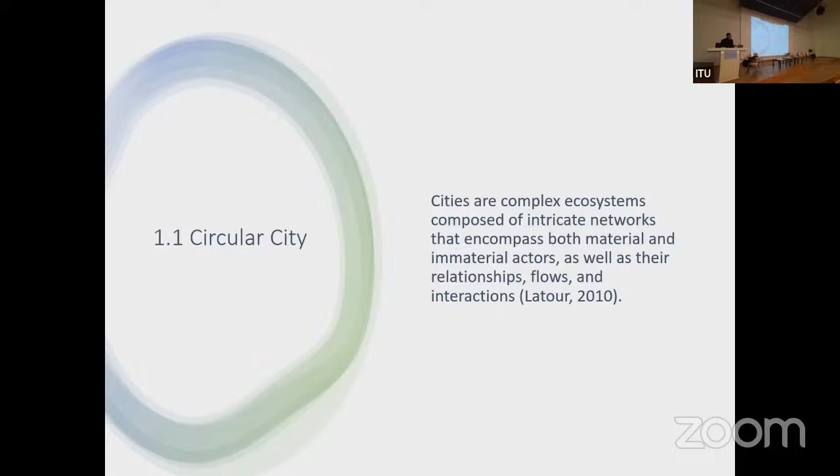But enabling circular cities requires profound cultural mindset shifts on our part. So here you see a diagram from 1977. This ecological perspective provides a rich frame that we need to revisit.

Systems thinking has always been present in our thinking, but now if we frame cities, we understand them as complex living ecosystems with intricate flows of materials, energy, people, and information. If you think of cities as having a metabolism, taking resources, transforming them, into waste, this is completely transformed by understanding how cities are and how we can co-create them.

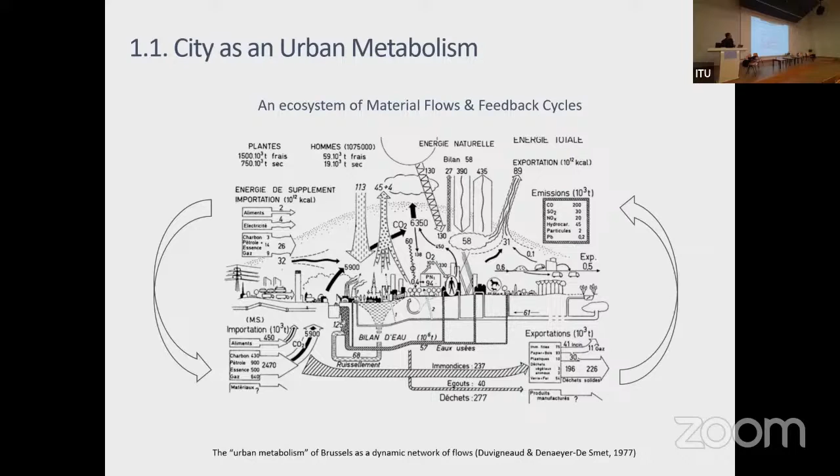So how do we create sustainable circular cities? The circular economy gives us valuable feedback on three key strategies. First, optimizing our use of resources, doing more with less. Second, extending the lifespan of products through repair, remanufacturing, repurposing. And third, adopting regenerative practices that restore resources.

What shifts in policy, business, and culture are needed, and could digital innovation be a catalyst? Transitioning to circular cities necessitates changes at multiple levels: top-down initiatives led by governments and policymakers, and equally bottom-up grassroots efforts by communities on the ground. We need to transform systems of optimization, sharing, looping resources, and exchanging goods and services. And critically, we need to harness the power of digital technology.

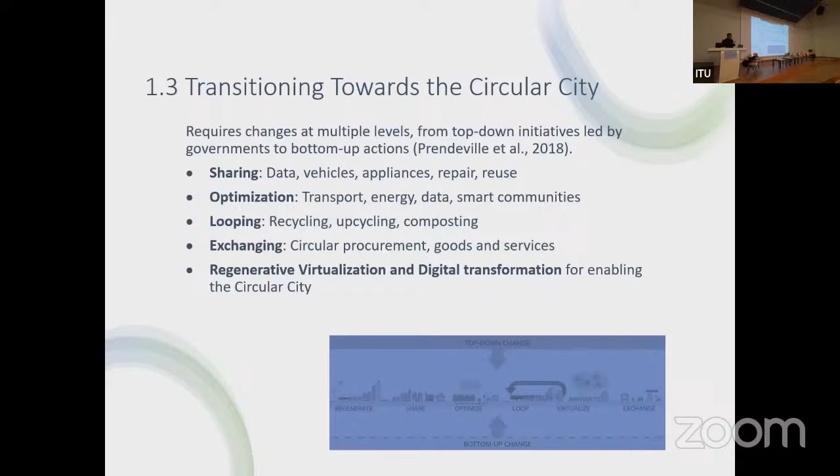So here are the two main questions I would like to address in this part. Based on the premise that digital transformation requires cultural mindset shifts beyond adopting technologies, to enable digital transformation for circular cities, what types of shifts in our understanding are needed? And question two, from an eco-inclusive design perspective, what are the agencies of digital technologies and objects in relation to the circular?

So here's a proposal with mindset shifts required to enable the transition to circular cities: ontological, cognitive, epistemological, axiological, and methodological transformations in our underlying mental models about cities, resources, and our philosophical stance.

So we understand spatial practice with a human-centered worldview. However, rethinking cities as circular, regenerative entities creates a paradigmatic opening, a creative rupture which we can reach with the help of digitalization strategies.

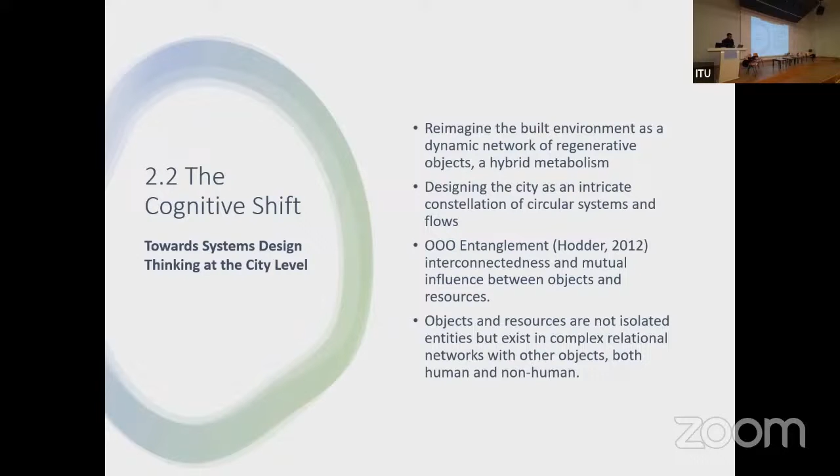And how can cross-sector knowledge co-creation cultivate innovation for digital transformation enabling circular systems? Epistemologically, we must transition from knowledge produced by isolated experts to cross-disciplinary, socially constructed knowledge. Learning together in context, we can gain wisdom about real-world challenges. This is the epistemological shift from mode 1 to mode 2 to mode 3.

Circular cities we design just for efficiency. Axiologically, this means transforming values away from efficiency and profit towards care, social justice, and environmental responsibility. Cities have physical, mental, and social dimensions, and how can we integrate ecological dimensions ethically?

Building on Lefebvre's spatial model, here I propose an ethical opening. I suggest adding an ecological dimension, generated with a protocol schema that interrelates the physical, mental, social, and ecological spaces of the city.

So the last mindset is the methodological mindset. Digital technologies proliferate during this era, so how can these technologies catalyze circular cities?

Methodologically, we must embrace digital transformation and participatory cooperation as key processes for cultivating circular cities.

Integrating key concepts from object-oriented ontology, we need to recognize and make use of the circular agency of algorithms, the agency of data, the agency of objects, sensory objects, hyper-objects, hybrid ecologies, and digital materialities.

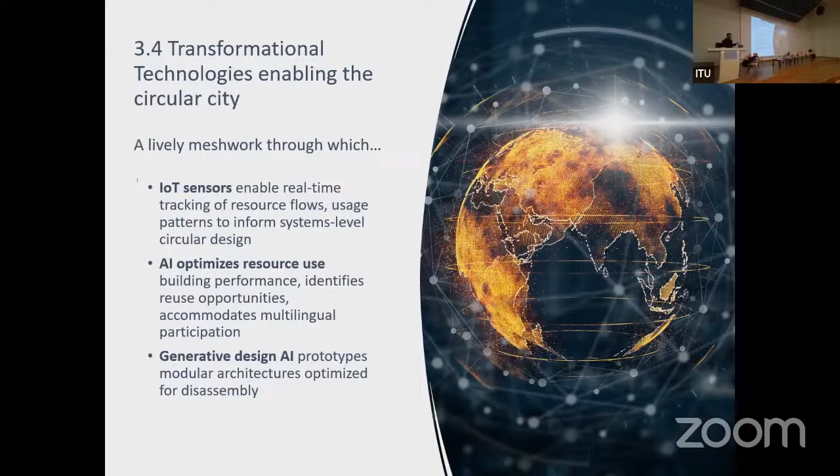Artificial intelligence enables adaptive management of complex urban ecosystems, and generative design facilitates modular architectures for disassembly and reuse.

Imagine a circular city where we use computer vision to automate life cycle assessment to reduce carbon waste. By reinforcement learning AI techniques, we model ecosystem dynamics, enabling coordination of interconnected urban systems.

Blockchain can provide secure tracking of materials and assets across entire life cycles, and smart contracts can automate circular transactions between diverse stakeholders.

How do these technologies integrate and accelerate the making of circular cities? Industry 5.0 couples digital fabrication tools like 3D printing with community creativity, and digital twins can allow virtual modeling of virtual resource mechanisms.

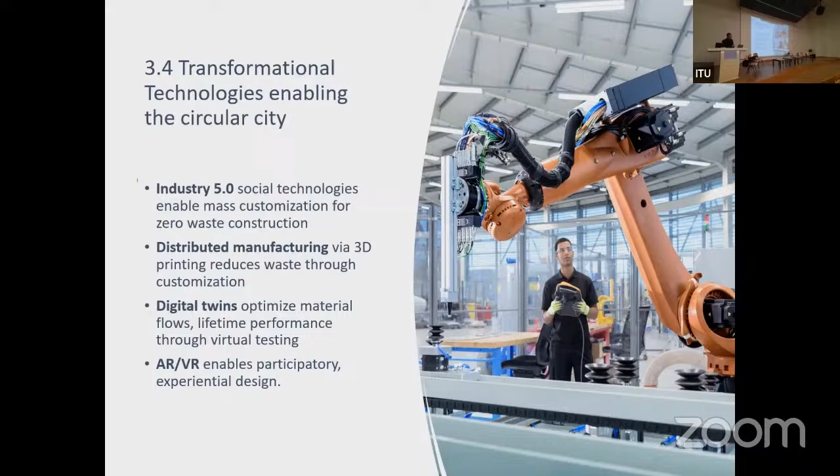And extended reality platforms can cultivate embodied experiences of future circular cities.

And last but not least, mixed reality, building information modeling, sustainable material libraries, and open urban data standards, like the valuable projects introduced in the first session, complete our technology toolkit for cultivating flourishing circular cities.

In closing, I would like to mention that enabling circular cities to regenerate resources requires both cultural mindset shifts and eco-inclusive digital transformation. So I would like to leave you with this question: what kind of digital transformations, tools, and software do we need...

...to enable the co-creation of circular cities?

I wanted to talk to you about timber construction within this context of the circular economy in the built environment. But just a few words on where I'm coming from.

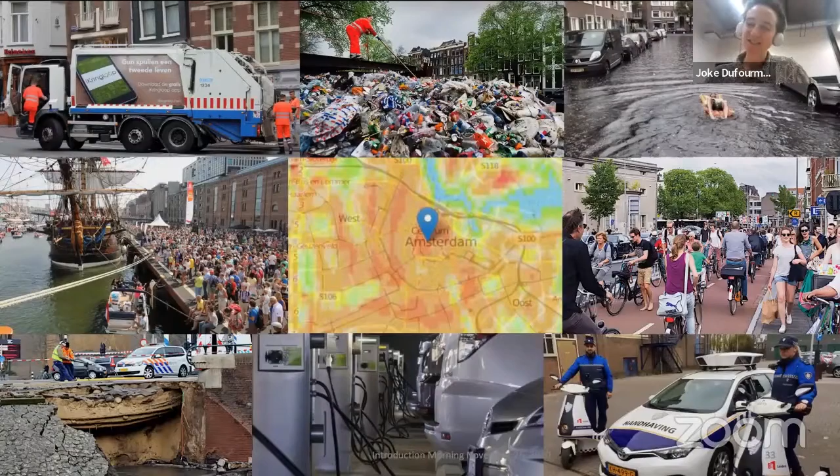AMS Institute is the Amsterdam Institute for Advanced Metropolitan Solutions, and rather than that name, what you're seeing here on the screen is probably a collection of problems that could be qualified as advanced problems in an urban context.

That can bring them together, and that's something that we're looking to tackle at AMS Institute.

We're looking to build a more prosperous city, specifically Amsterdam. For those of you who recognize the picture on the screen now, this is aerial footage of Amsterdam.

And we want to make that city more smart, sustainable, and resilient in the future.

The way we're doing that is through collaboration. We are a network organization, or a networked research institute, where on the one hand, and I like to compare this with Lego blocks, we have our academic partners.

Our academic partners are the Technical University of Delft, the University and Research Center of Wageningen, and MIT. On the other hand, which is the other side of the blocks, is the city of Amsterdam. So the municipality of Amsterdam is the fourth partner in this network.

And what we're looking at with our partner universities is developing solutions for this city, for the city of Amsterdam.

But then when you bring these two blocks together, what you notice is that actually they don't quite fit together well.

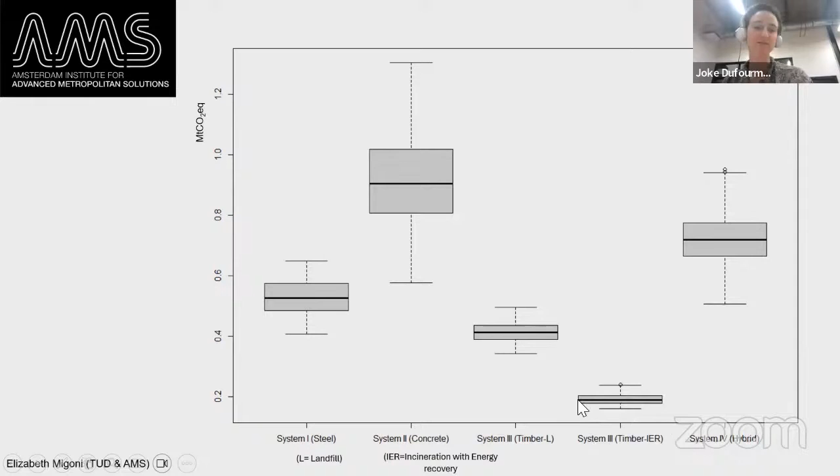And what we want is of course the lowest possible whole life carbon. So the system, a timber system that would often be applied here, is this one - system 3, where we use timber with energy recovery at the end of life. That is by far the system that is most advantageous when it comes to climate impacts.

So we're avoiding that. On the other hand, we're also storing carbon in those timber buildings that we build. Through the process of photosynthesis, trees take carbon out of the atmosphere and solidify it within their material. So as long as we use timber the way it is, as solid timber, that carbon remains in its solid form and doesn't contribute to climate change anymore. So we're also storing carbon in timber.

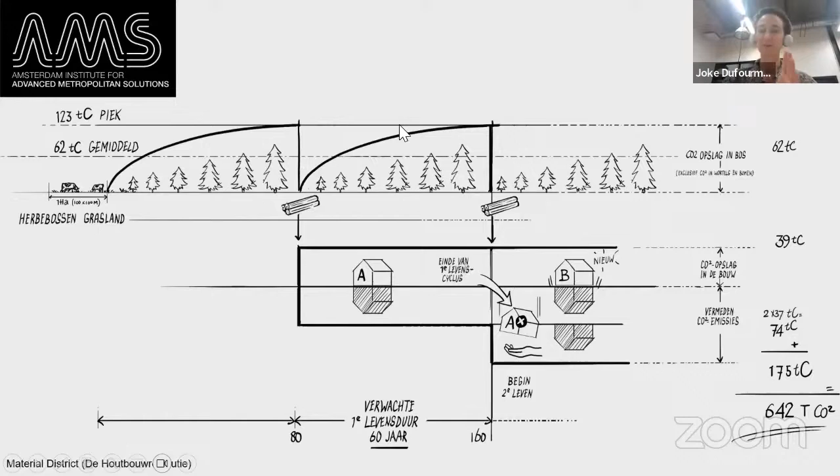And then thirdly - this lever, by the way, is not something that was integrated in these calculations - a third climate lever of timber is that we're storing carbon in the forests that we grow. So there's really 3 reasons why building with timber is good for the climate: we're avoiding emissions of conventional construction, we're storing carbon in our built environment, and we're also increasingly storing carbon in our forests, on the condition that they are sustainably managed, of course.

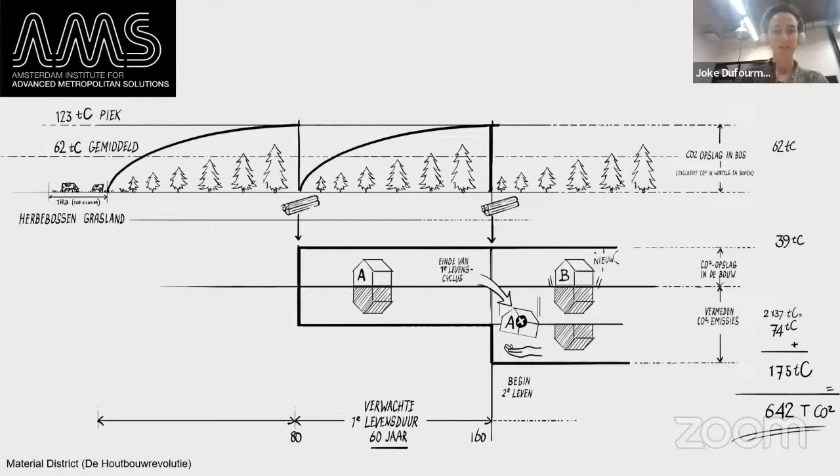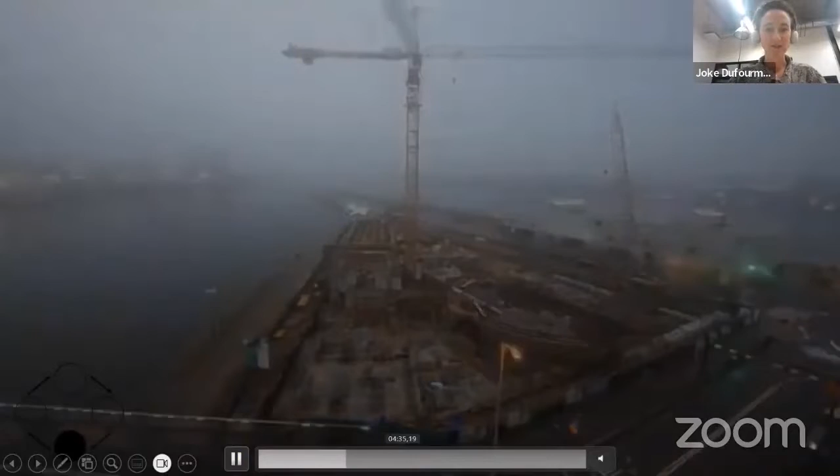Next to that, so not just for the climate, timber is also a really interesting material for the construction industry, in the sense that it lends itself very well for industrialization. So this is a video that I want to show you - a time-lapse video of Hotel Jakarta, a building that was built a couple of years ago here in Amsterdam. In the background you can see Central Station, so we're very much in the center of the city. And this hotel uses a kind of conventional base for the building.

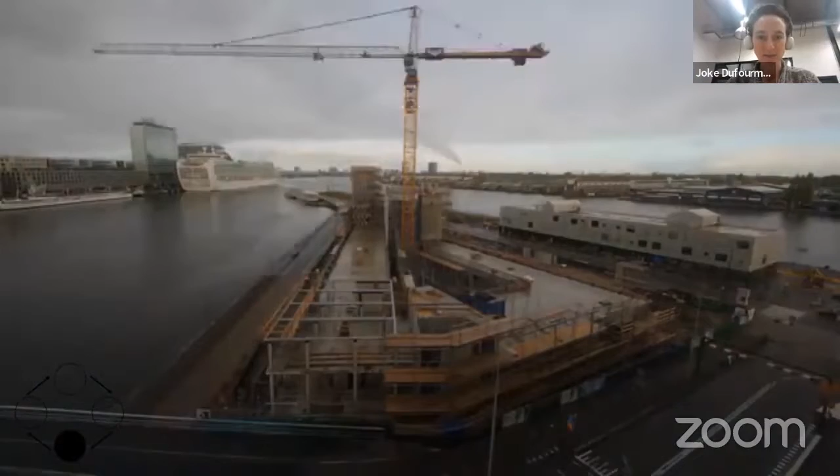But then the entire upper layers are made from prefab timber modules. This is about the moment in the video when we can start to see the modules arriving. And so now if you look at the back of the construction, that's a construction site.

That also means that we're radically reducing the kind of annoyance that construction sites tend to give in the city. So this type of image, we would like to see much less, and timber is a way of getting there. Less annoyance, but also high potential in terms of fulfilling housing demand within existing cities.

Timber is a light material. That means it's actually very suitable for different archetypes of building. On the one hand, because it's so light, it's very suitable for floating solutions. Here you see a district in Amsterdam, a floating district called Schoonschip.

But because it's so light, it's also very applicable for using in topping up, where you want to be really conscious of the weight if you want to keep using existing foundations.

But thanks to current technology in terms of mass timber products, we can even start building 100% bio-based timber buildings, even in high rise. So even for really fulfilling different needs in the city, timber is a very applicable material.

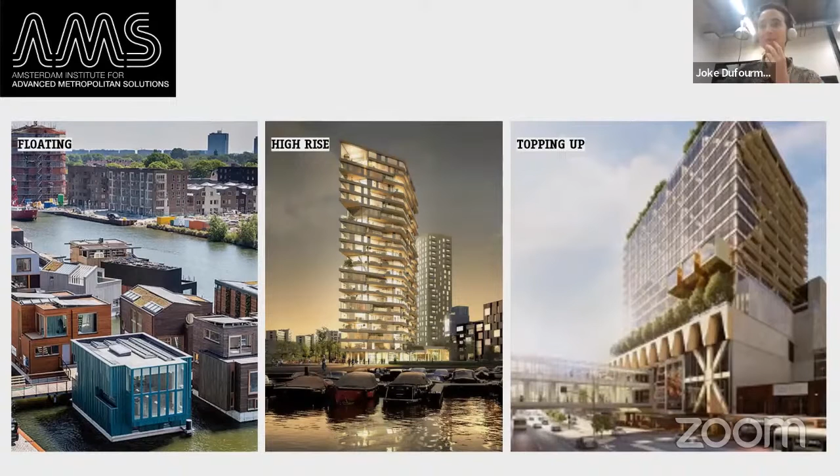Now, if we're seeing all this and hearing all this, one's immediate reaction can be, oh fantastic, what's not to like? Why are not all of us doing this? So this I want to point out a little bit more.

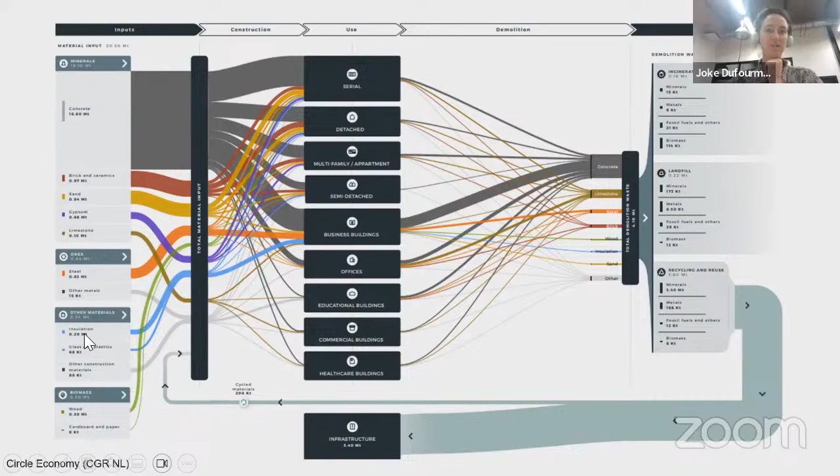This graph summarizes the materials that we use in construction in the Dutch construction industry. On the left-hand side you can see the different materials that go into the Dutch construction industry. If you zoom in there, right at the bottom left, that's how much wood and other bio-based materials we use. Right now we're at about 2.3% of building materials, based on volume, not weight.

2.3% of materials that go into the Dutch construction industry that are regenerative. Why so little? Just as a quick disclaimer, the Netherlands is different than other countries. There are countries like Sweden and Austria that have much more of a building culture where timber is ingrained. In the Netherlands, we have completely lost this.

One of the reasons for that is that there are quite a few misconceptions about timber when it comes to using it as a building material. There's quite a bit of preconceptions about it that aren't necessarily based on facts.

And that's why we said, if we want to achieve that 20% of regenerative materials in the Amsterdam metropolitan area, we're going to have to do something about that. That's why we embarked on the project of mapping out what the most common misconceptions were of the timber industry or timber construction, and then seeing what science says. We didn't necessarily produce new knowledge, but it was more of a compilation of existing knowledge, both from science and from case studies. This publication resulted from that.

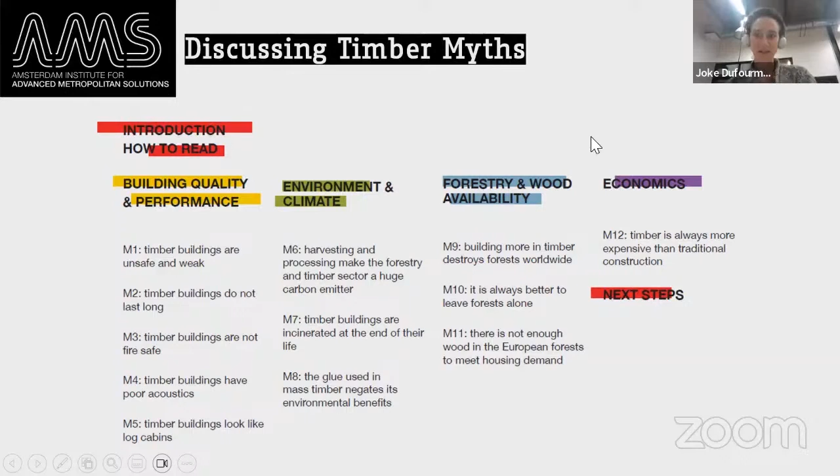What we noticed is that the most common misconceptions in the Netherlands really fall into four categories: some that relate more to building quality and performance, some that relate to environment and climate, some that relate to forestry, and some that relate to economics. So what I wanted to do for this presentation is really highlight a couple of these myths.

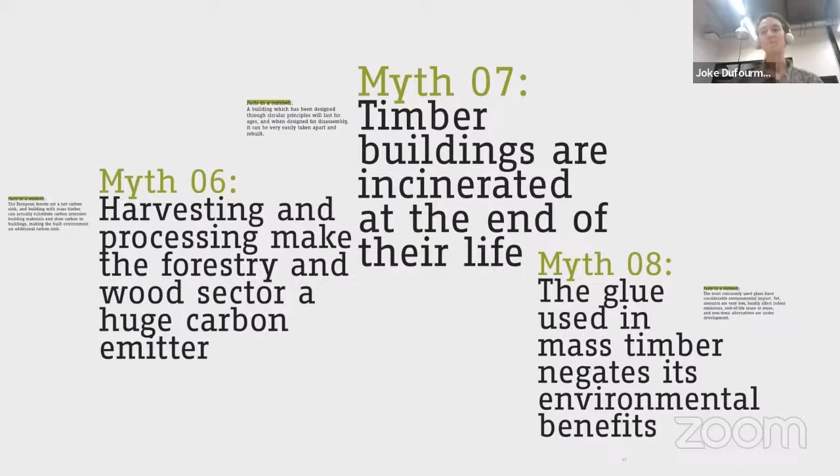First of all, there's the environmental impact of timber. Quite often I would receive a question where someone would say, hey, but actually all the harvesting and processing activities, don't they kind of nullify the carbon benefits of timber construction? And what about incineration of timber buildings at the end of their life? What about the glues and adhesives? Aren't they highly toxic materials that also nullify those environmental benefits?

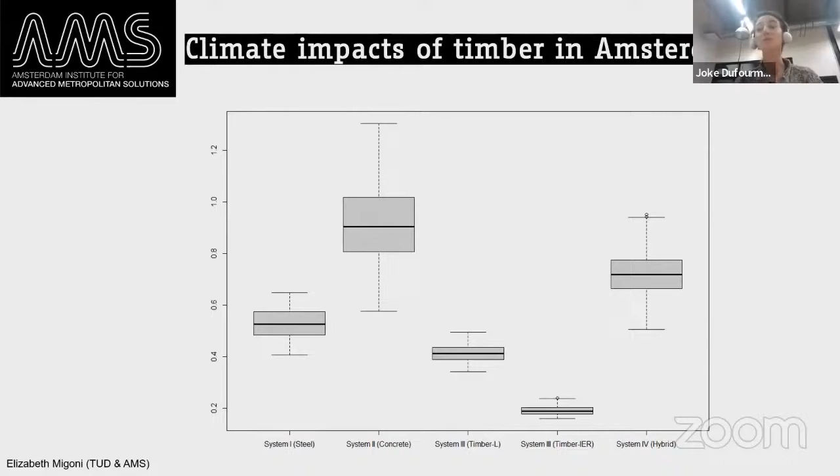Once again, going back to this graph, this is whole life carbon that we're including here. So all the materials and the steps in that supply chain, modules A to D, are included in these calculations. So the answer there is no, they don't nullify those benefits. Moreover, we did a brief calculation as to what the effects would be for the Dutch carbon budget of the construction industry if we realized our timber ambitions, or regenerative and bio-based ambitions, in the Amsterdam region.

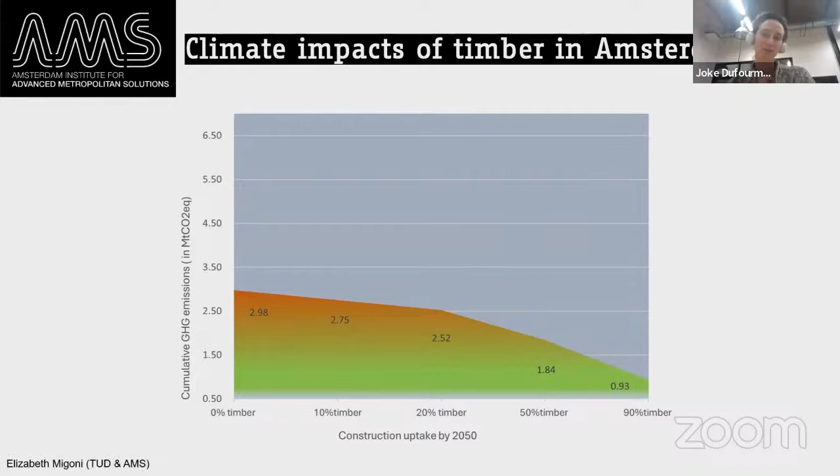And then we see that actually, going from taking much more than what would be rightfully our share—if you look at a balance of a per capita budget, for example—to going to practically zero, I can't say zero, but a very, very small share of the Dutch carbon budget of the construction industry. So that doesn't necessarily hold.

When it comes to incinerating timber at the end of its life, that also doesn't necessarily hold, because what we see is that timber, partly because of its industrialized applications, is a material that really lends itself very well for reusing and for circular principles.

I'm sure you've discussed cascading at the conference today already. Timber is an extraordinary material for the ability of cascading, where we can start with the use of mass timber products, and then ultimately reuse it in other buildings up until it's not possible anymore.

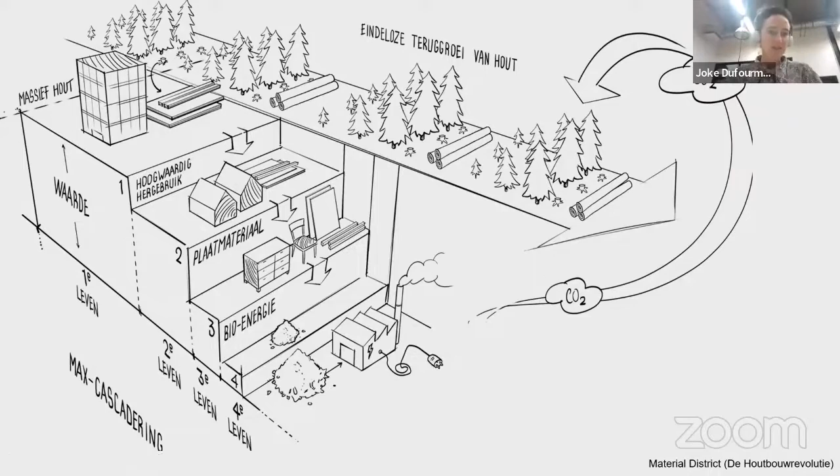In terms of structural integrity, for example, we start using it as a board material until it ultimately becomes bioenergy. But by the time we've run through this entire life cycle, we're about 150 years further. So if we're looking at that time span, that forest can actually regrow multiple times during that one lifespan of a timber component. So in that sense, also very high potential for those circular practices.

That doesn't mean there's no possibility for improving. There's still a certain climate impact of the timber construction industry, so here we analyzed all whole life carbon emissions for those different material archetypes of buildings, and then we noticed that from that timber system, what becomes most relevant—this is the right one to look at, by the way.

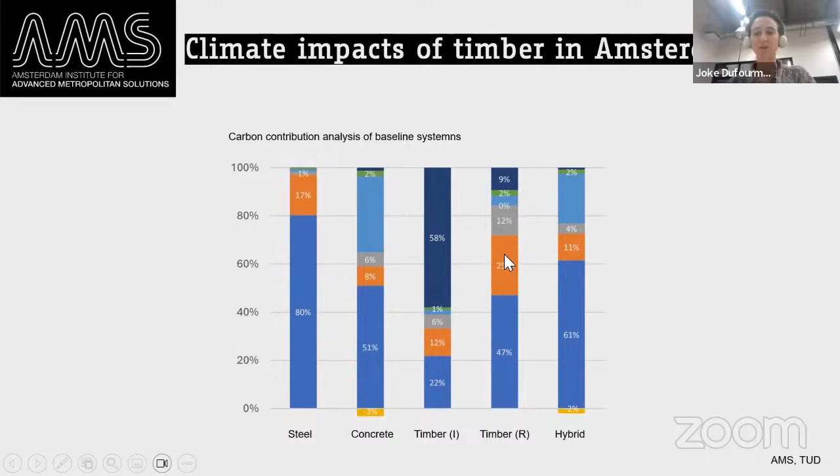What we're seeing here is the impact of the end of life of timber in case we incinerate it, or in case we cascade it—which is also, in practice, the case in the Netherlands. One of the more problematic factors becomes logistics. That's what the orange share is right here.

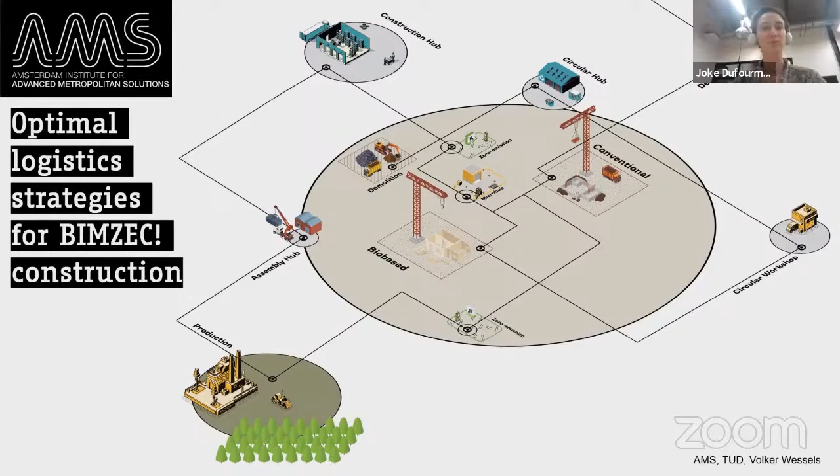There's all kinds of supporting activities that can take place there and reduce the logistics-related emissions by another 30%. Right now what we're doing is modeling the optimal locations and functional programming of these hubs in the city.

Another question we receive quite often relates to forestry: is it always better to leave forests alone? Our forests are so precious to ourselves, to global ecosystems, and to the climate, that we can't possibly be cutting down the trees there.

Well, the reality is a little more nuanced, in the sense that forests actually do benefit from sustainable forestry and sustainable forestry management. Here we see a baseline of what we're doing right now in terms of non-intensive forest management—what happens if we leave the forests alone, which isn't necessarily the best scenario, as you can see—and what happens to the climate impacts of forests that we use as production forests.

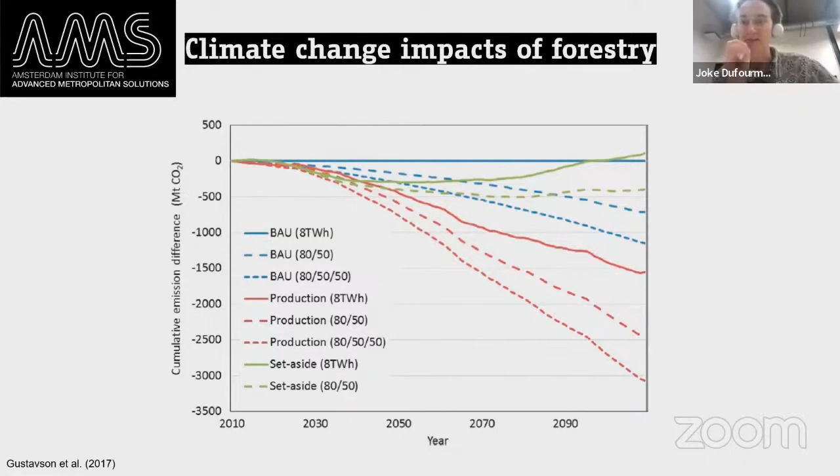And then one last one to end with, which could serve more as inspiration. From an architectural point of view, is timber really an interesting building material? Or are bio-based materials interesting building materials? I wanted to show two things—one relates to bio-based materials and what their potential is for architecture today and in the future.

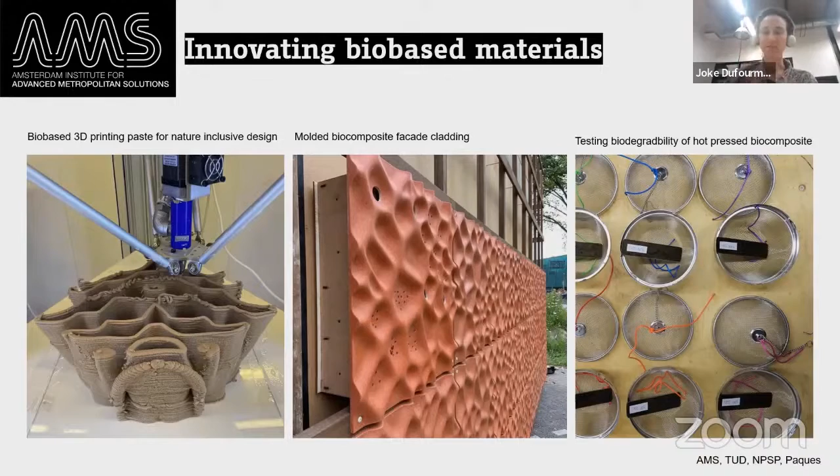These are some projects we're working on at AMS Institute in terms of developing biocomposites. They're often waste-based, but always bio-based, and to what extent you can make architecturally interesting shapes with them. But also just inspiration from other buildings in Amsterdam, in the Netherlands, and around the world, to show you that timber is a highly versatile and potentially really interesting architectural material to apply.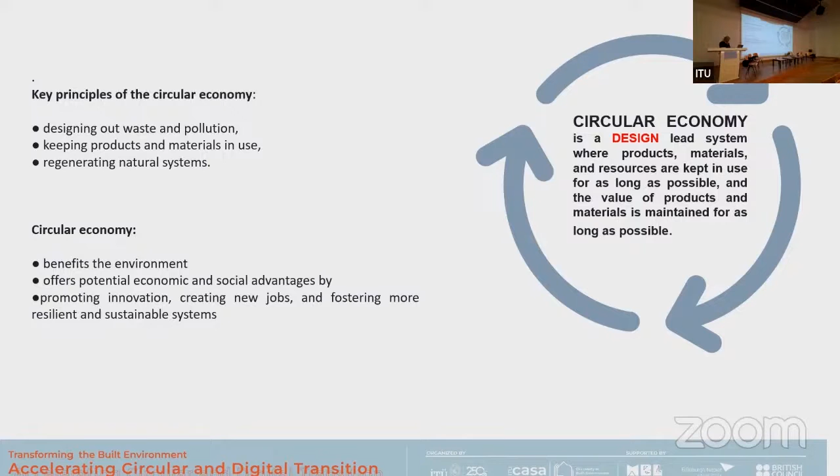When we look at the cities, they consume 75% of the natural resources and produce 50% of the global waste, 60 to 80% of the greenhouse gas emissions. So it is very important that we define how we are really going to integrate the circularity concept into the city scale.

Which is the system, the machine that is actually polluting our world. So for macro scale, Mustafa Şahin was telling in his discussion that there are 3 scales of applying circularity: meso, macro, and micro scales. This is a macro scale actually, where we have to really try to find the way how we are going to apply this concept.

What is circular economy between the cities - design out waste, and what if we design out waste and pollution from cities, or what if we keep products and material in use in cities and maintain their value, or regenerate the natural system in and around the city? These were the discussions and questions put on the table by Ellen MacArthur Foundation about circular applications at the city scale.

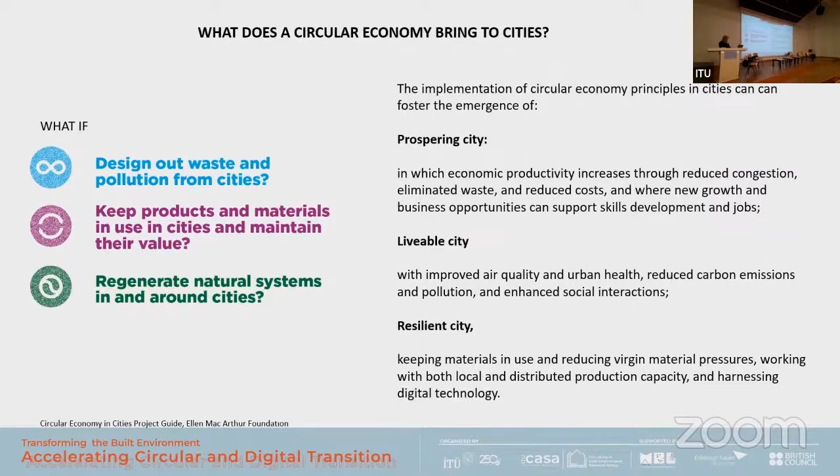So the cities that are applying the circularity concept have the promise of prosperity, a livable city, and a resilient city. They can achieve this type of city.

In cities that implement circular economy, there are a lot of benefits that we can find, really, but there is no possibility that we can apply all these concepts 100% in cities. So the best way is to start with simple scales, small scales, then develop the best cases, so that society can accept these new changes.

I think that's the last one. I'm going to take a bit long.

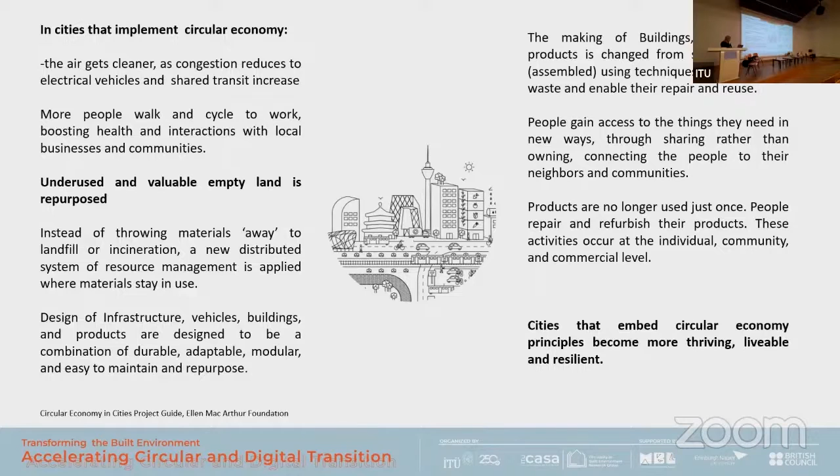So, utilizing the circular economy concept in cities has a wide range of benefits: resource efficiency, environmental stability, economic opportunities, resilience, and security. All this needs to be put into discussion with the education part.

Because we can teach this concept and it remains theoretical for the student's mind. It is important that they generate concrete answers from all these benefits that are discussed for the cities. So we are trying to structure the courses in this way.

So who can enable the transition to a circular city? There are many partners, but the main ones here are academic institutions and city governments. Academic institutions are producers of knowledge and foster collaboration, and city governments have the power to really expand the applications to the society and to the city scale level.

So the course that we developed, Circularity in Urban Environment and Digital Platforms - the Circularity Local Platforms course - was developed in collaboration with the municipality, as I mentioned. The course was structured on transformative research to spread the word about circular economy and to explore potential applications of circular economy principles at various scales and layers in the Kadıköy district.

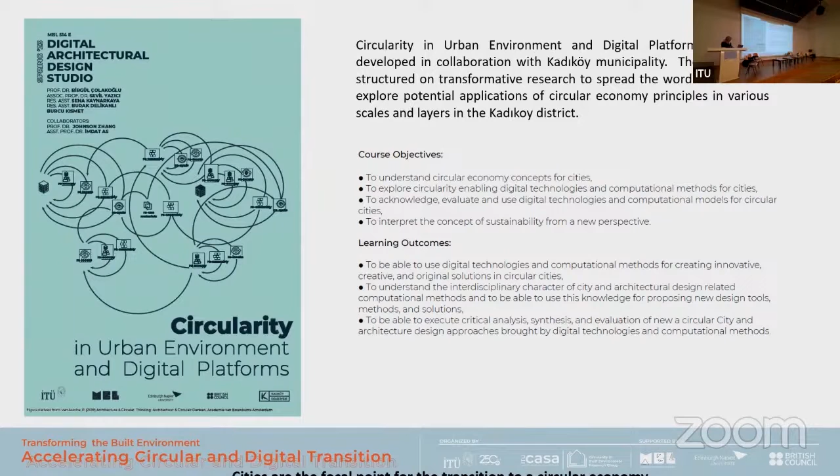How to structure the course? Firstly, we have to introduce students to what circular economy is, because architecture students are not introduced throughout their education to this new concept. And the way that they design is really more a romantic approach to design rather than a systematic or analytical approach. So they first need to understand what circular economy is, what its concepts are, and at what scales it can be applied.

So they do a lot of research, literature research, and they try to identify and extract the principles and which of them can be applied to cities.

In parallel, we work with the Kadıköy municipality to find out which of these circular economy principles can be applied. Then they did the analysis of the Kadıköy district on their own, and from the knowledge they extracted from the best cases in the literature, they tried to identify which of the circular concepts can be applied at the city scale.

And then they applied this research as group work. They identified thematic topics: built environment, energy systems, urban mobility, urban bio economy, and local production systems. Within this, we discussed these topics further.

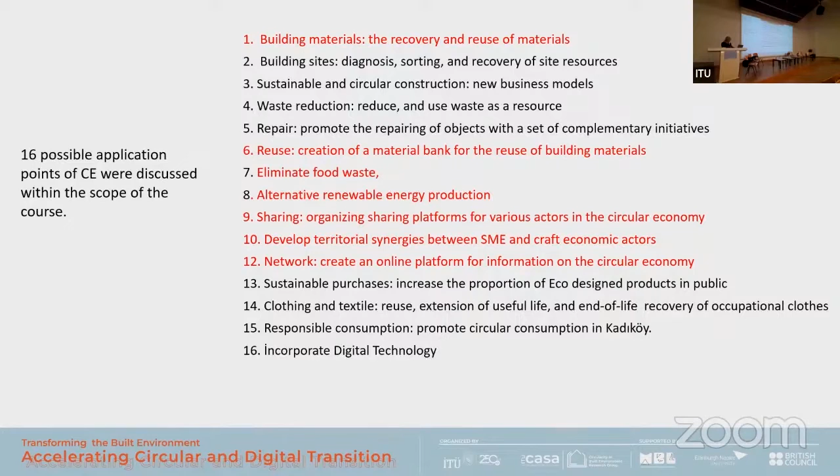These are the outputs of this work. They generated circular Kadıköy management, looking at the craft district, because Kadıköy is very rich with craft culture, and how this craft culture can be sustained and developed further based on the materials they use, circular material, and creating an ecosystem for craftsmen. They also looked at circularity transformation of the Kadıköy district, energy savings via movement, and circularity foods for Kadıköy.

I want to present two of the students' works. The first one is urban mining in Kadıköy. The study highlights the potential of recovering construction material from the built environment, particularly through urban mining initiatives. It presents a case study from Kadıköy, Turkey, to visualize the materials generated during the construction and demolition phase of the built environment.

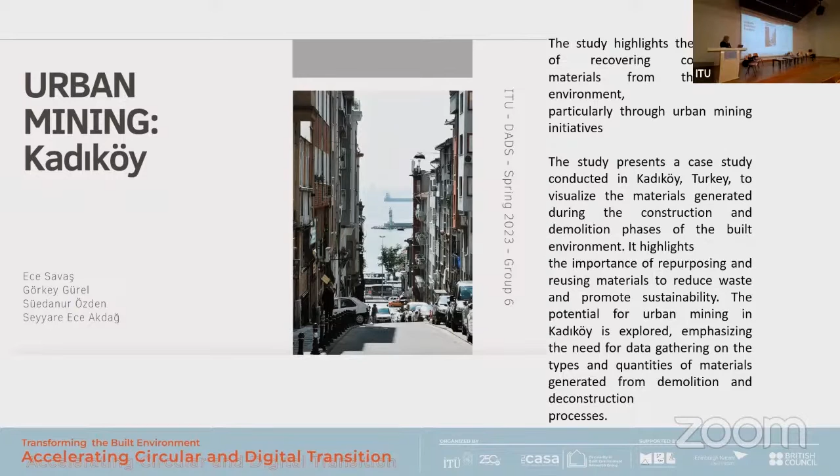Now I will leave you with the students' presentation, a short 3-minute presentation: Ece Savaş, Görkey Gürel, Süedanur.

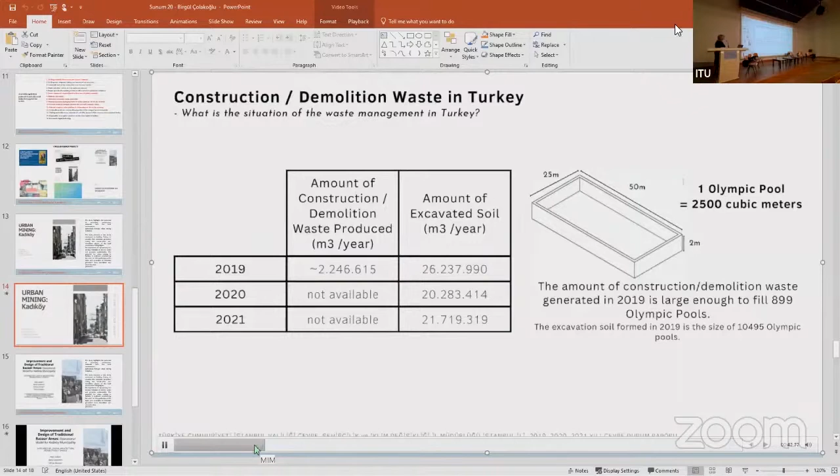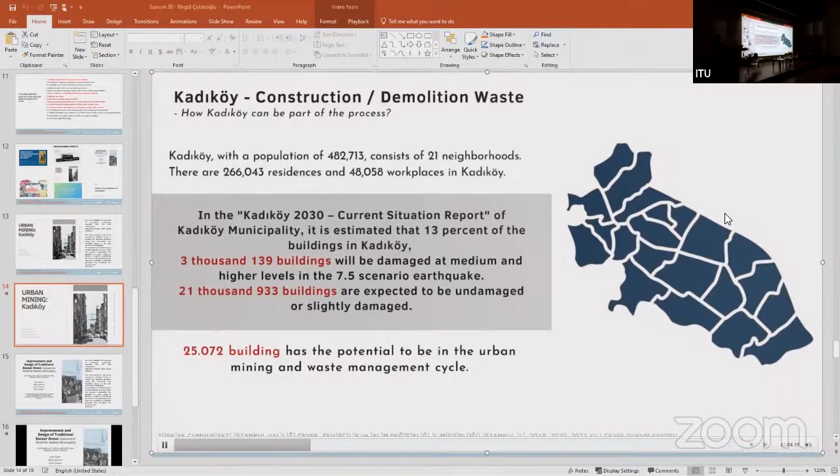Data gathering is one of the important issues in the urban mining process. Kadıköy has 21 neighborhoods with a population of around 480,000 people. Around 25,000 buildings have the potential to be in the urban mining process and waste management cycle because of earthquake risk. So there is a need to re-evaluate the buildings and think about how we will benefit from these demolition processes.

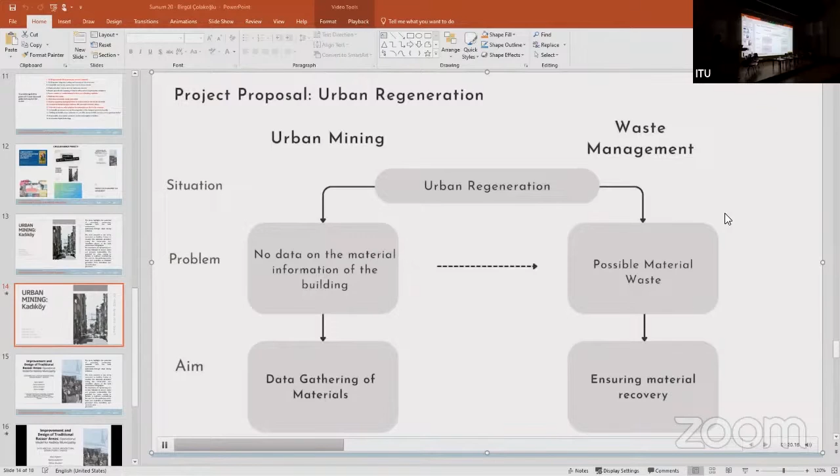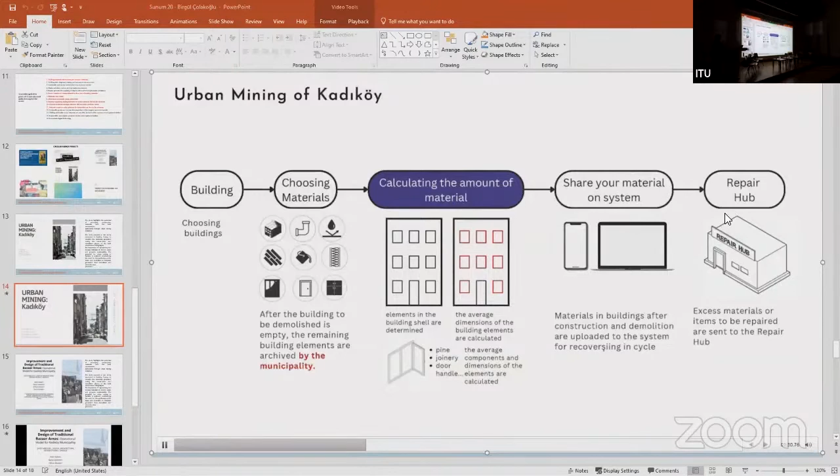For these reasons, we have two main approaches in our project: data gathering for urban mining of existing materials, and waste management for how we can use waste material. The aim of our project is to help waste management by accessing data on existing materials. In the overall project, we plan to know the amount of material for each building and create a marketplace for waste materials.

To calculate the material amounts, we follow two main steps. First is making the model of the area, building by building. Then applying a material calculation algorithm to those building models. For the initial model, we only need the building footprint and textured facade, so we can either make a photogrammetric model or use Google 3D models. Once we have the model, we pass to the second phase, importing the model into Rhino and setting up the inputs for calculation.

The first input will be the building footprint, which we need to draw manually in Rhino. Then we need to place points at the column locations, which is our second input. Lastly, we will define window boundary rectangles, and maybe in the next step arrange the thickness parameters.

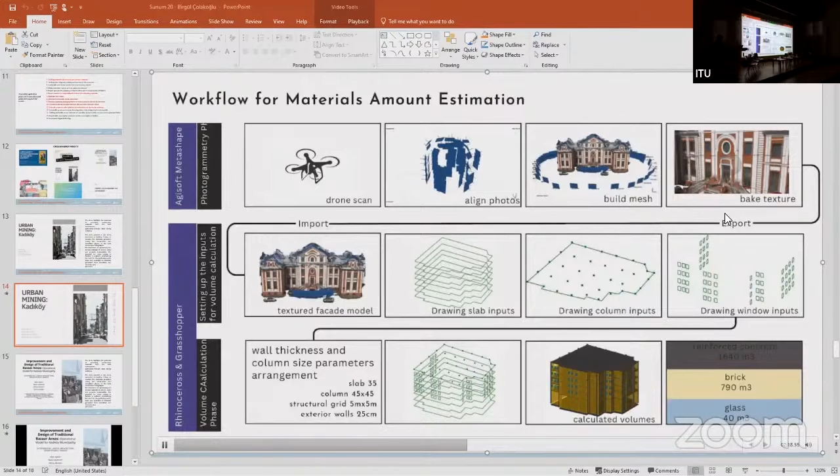Once we are done, the building will be automatically simulated with a structural grid, exterior walls, and windows. Points are created for estimated column locations, then the code defines the slabs and columns. For glass on the facade, we need to input the approximated rectangular boundary of the windows, and the material cubic meter values can be seen.

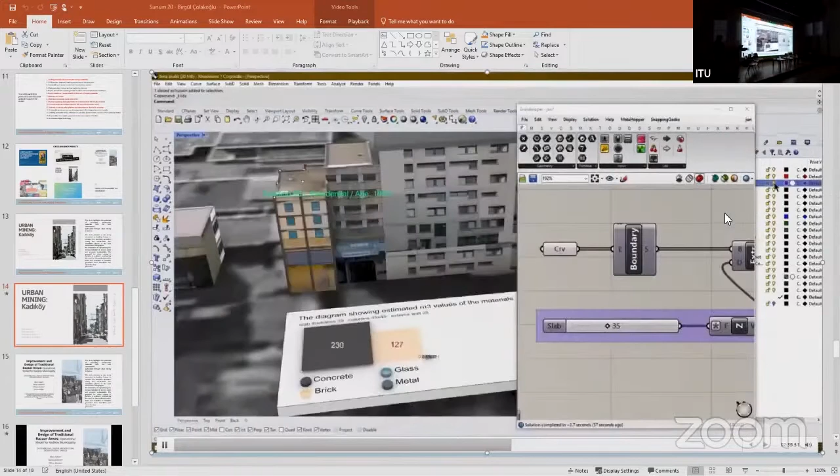Parameters like slab thickness have a direct connection with the total amount of concrete material. We can arrange the slab and column thicknesses, change the exterior wall thickness, and adjust the structural grid. Since only the exterior walls, columns, slabs, and glass parts are considered for calculation, we can assume existing values will always be higher than our analysis.

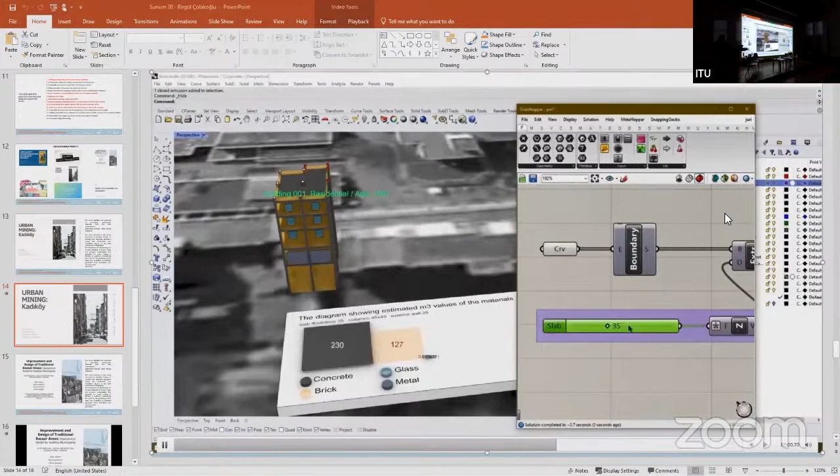A case study has been done using the existing model from Google. This is the PTT Kadıköy Başmüdürlük building. The inputs here are building footprint and column location. The outcomes are visualized in the bottom right of the screen.

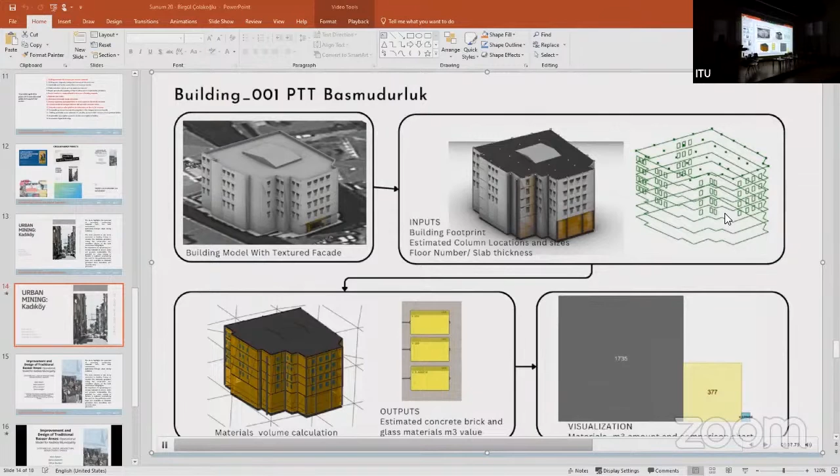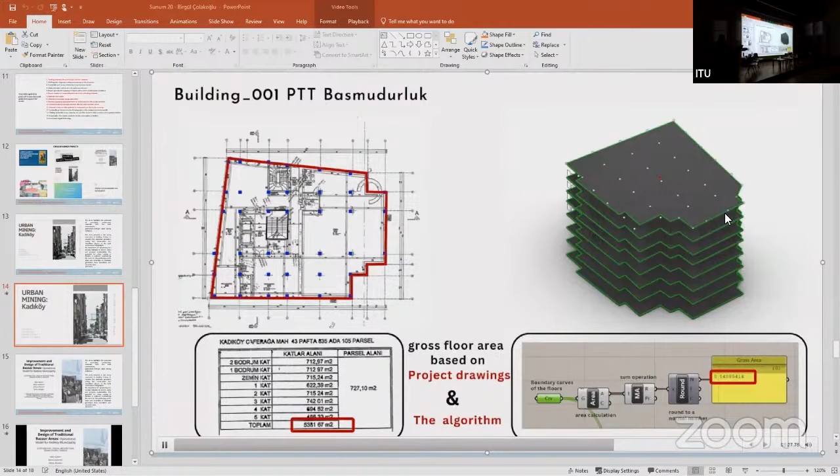Gray represents the concrete, yellow is the brick, and the blue is the glass amounts. We compare the output values with municipalities' drawings. The results are 5,300 versus 5,400 square meters. There is a 2% deviation and the result seems accurate.

As the final step, web page and mobile application interfaces are designed for the urban mining of Kadıköy so that the data will be eligible for everyone.

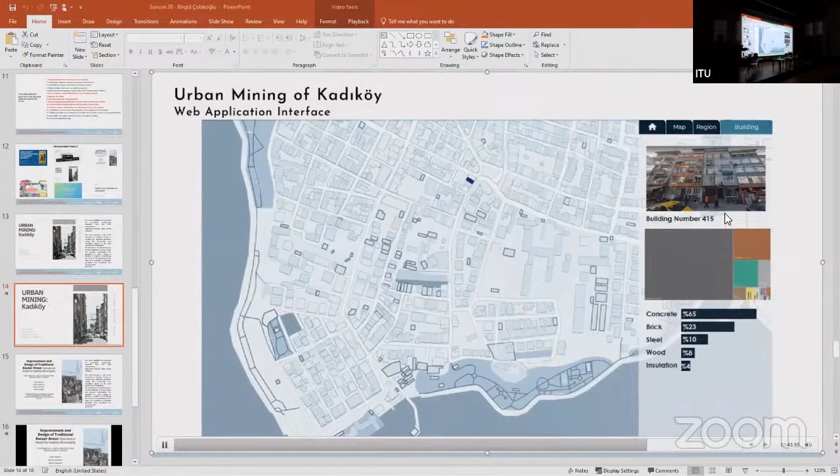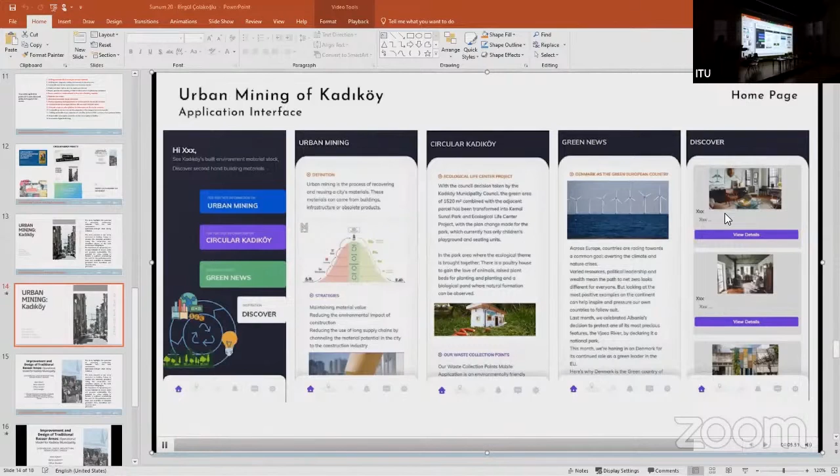The building material report can be accessed in the mobile application too. As a third step, sellers, buyers, and repairers are gathered in this application to make use of individual second-hand built environment materials, creating big impact out of micro-scale exchanges as a result of a cumulative societal act.

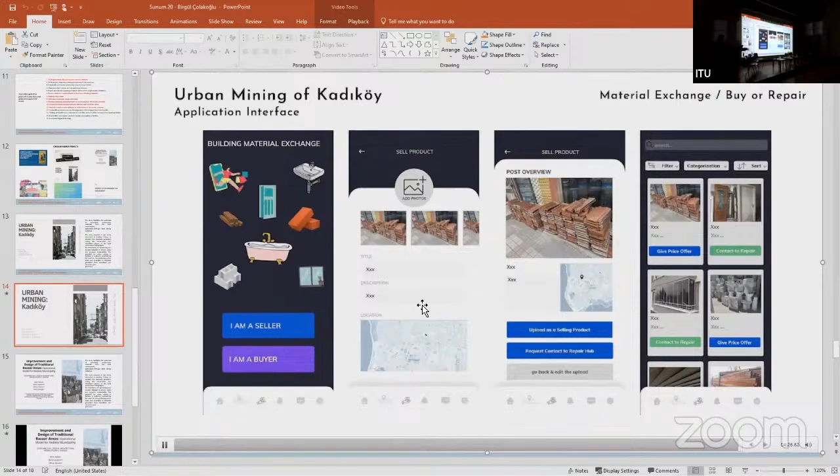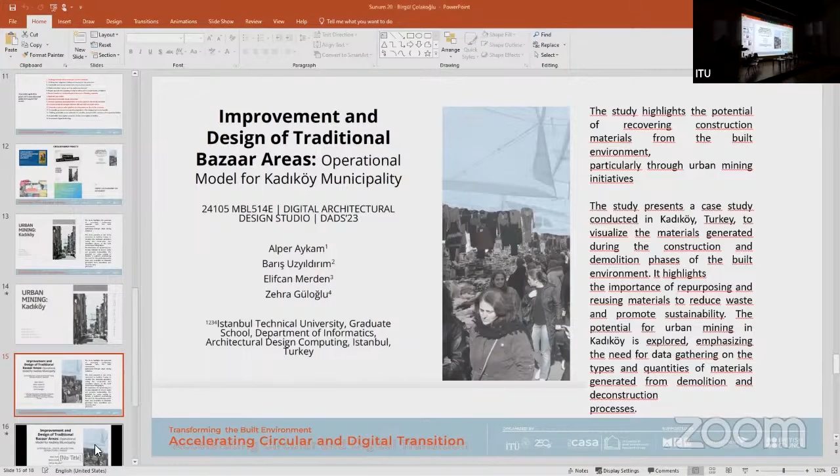This pazar concept, and how similar principles can be applied in the bazaar community and neighborhood community, and how the bazaar structures and settings can be improved.

Hello everyone. Today we are going to talk about the improvement and design of traditional bazaar areas, and explain our purpose, system proposal, and app idea supporting that.

Our aim is to develop the existing bazaar system by making them circular innovation hubs, since these areas bring different groups of people together. So we are highlighting the social aspect of the circular economy, which is overlooked.

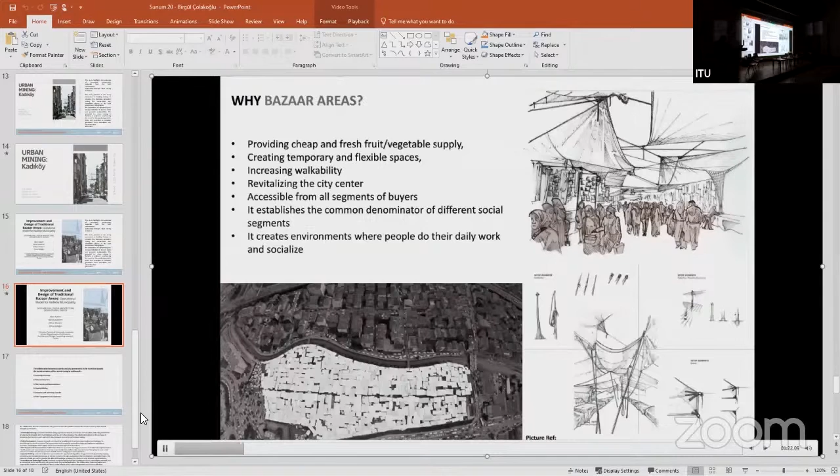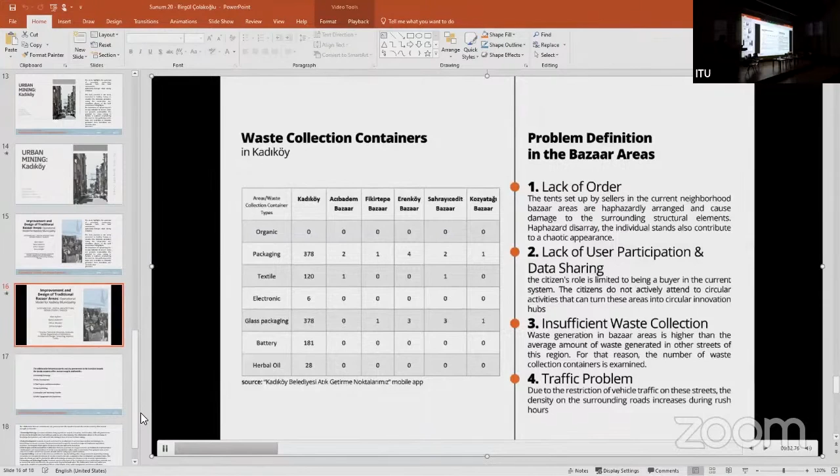We started by determining the problems such as lack of order and user participation, poor waste collection and traffic, and wrote accordingly. The left table shows the insufficient number of existing bins, supporting our definition.

Since we are working on Kadıköy, we selected 5 locations out of 7 based on criteria such as vicinity to public transportation, active usage, and whether or not it is located on the streets.

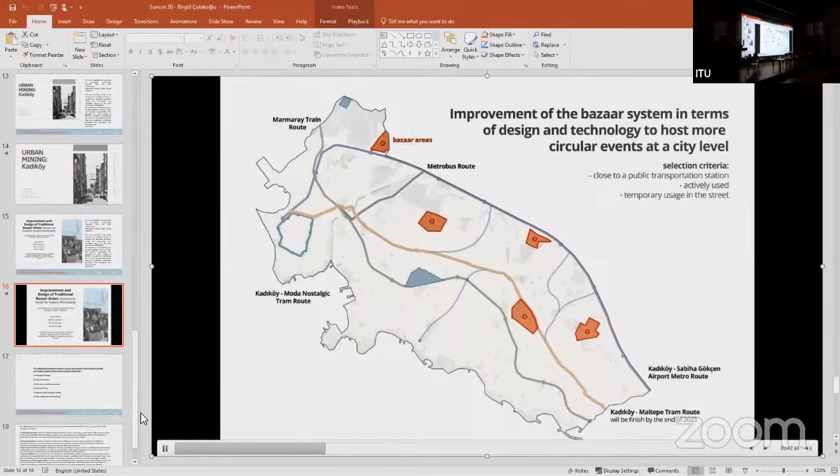The current system blocks the walkways and entrances, so we are proposing an umbrella-shaped canopy system that can be placed into holes located on the roads, which are normally closed with a lid.

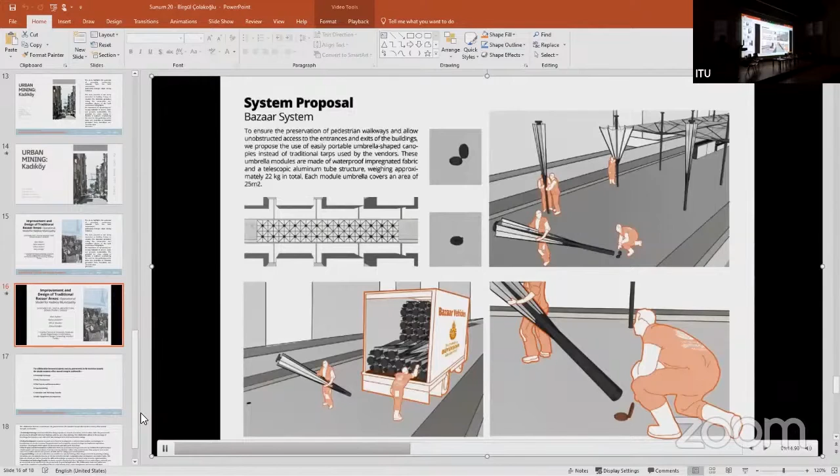When opened, the umbrella structures cover 25 square meters of length and contain 2 rentable areas. For the rentable areas, we designed a stand system to keep the bazaar area organized.

The stands are modular and made of fabric and aluminium, and we designed both structures lightweight to allow the municipality workers to fold and transport them to the next bazaar at the end of the day more easily.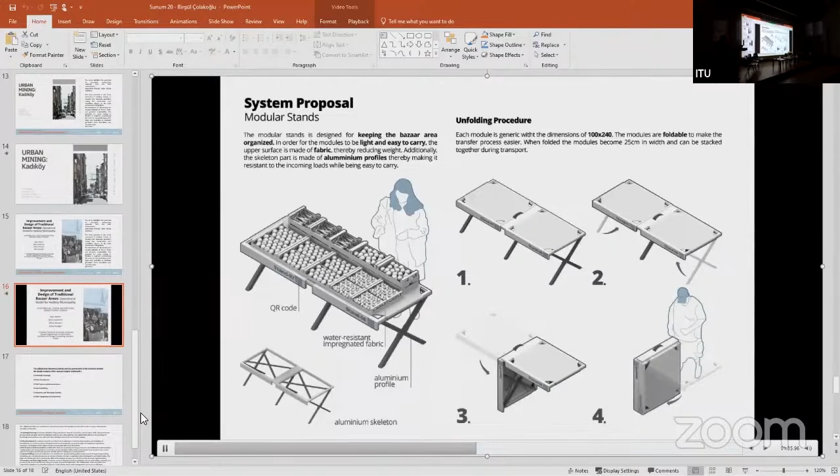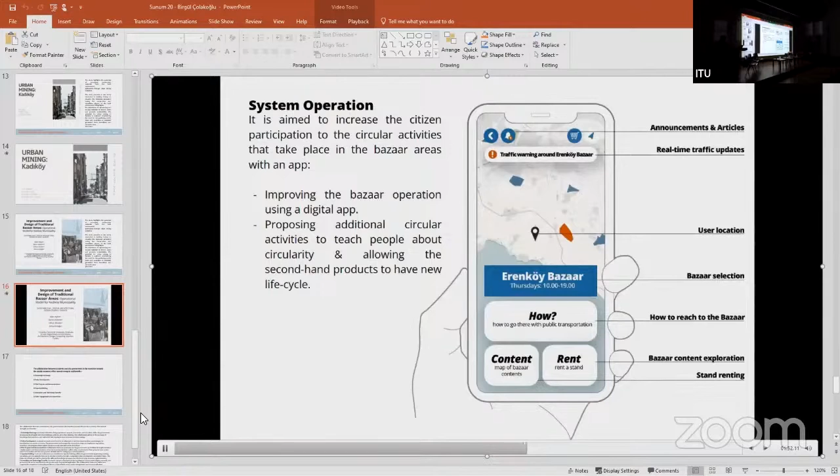By using the zoning map on the app and the QR codes on the stands, people can find products quicker and make more circular decisions by seeing product descriptions.

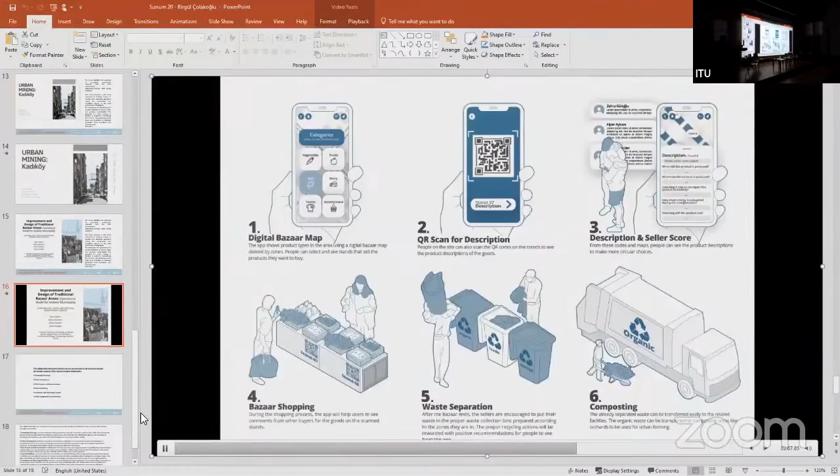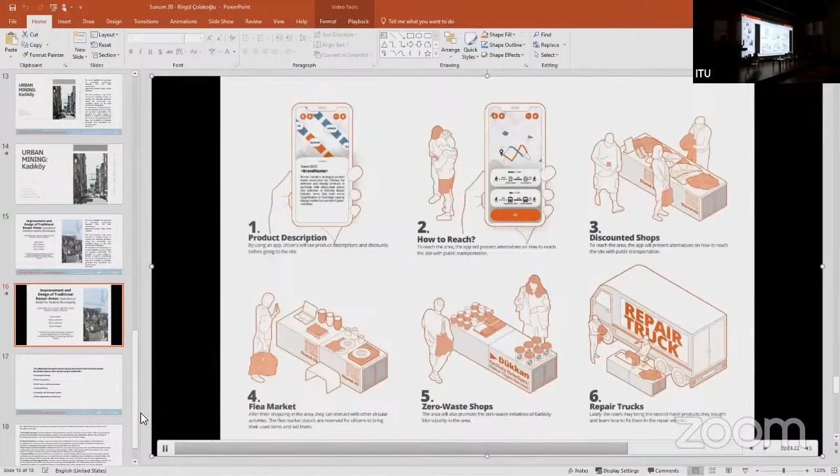We also propose new circular activities including flea markets, repair vehicles, discounted shops, and zero waste shops in the area. With this approach, the surrounding citizens can be an active part of the circular economy.

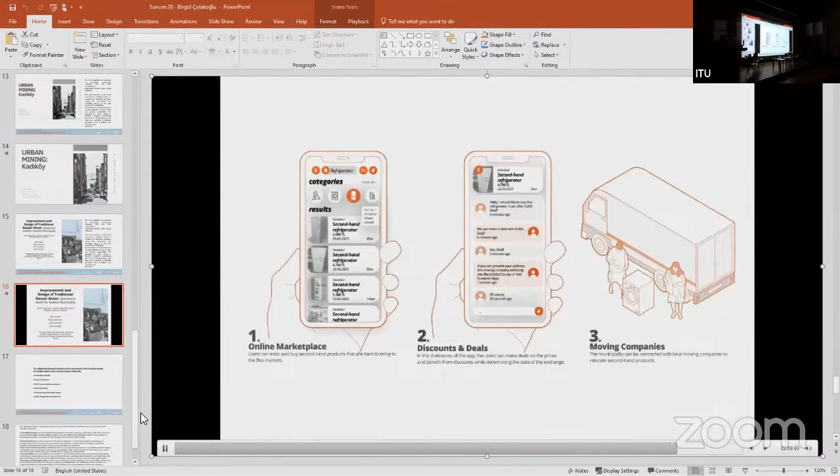The app can also help with the renting process of the flea markets, but the renting of the bazaars can happen with a formal application to make it easier for the sellers.

Lastly, the app can be used to inform people about the traffic on the surrounding roads and the workshops, so that people can apply through the app. So that's all for us.

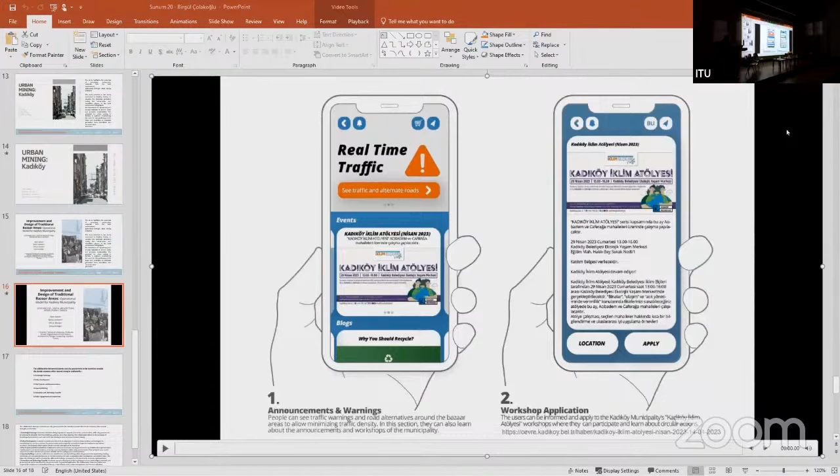I just get the last slide here. Hello everyone. Today we are going to talk about the improvement.

The working force that is coming knows exactly the problems of local governments, so they can really contribute at their level. I would like to give words to our representative of Kadıköy municipality, Serhat, who will give us huge support sharing data and discussing these issues.